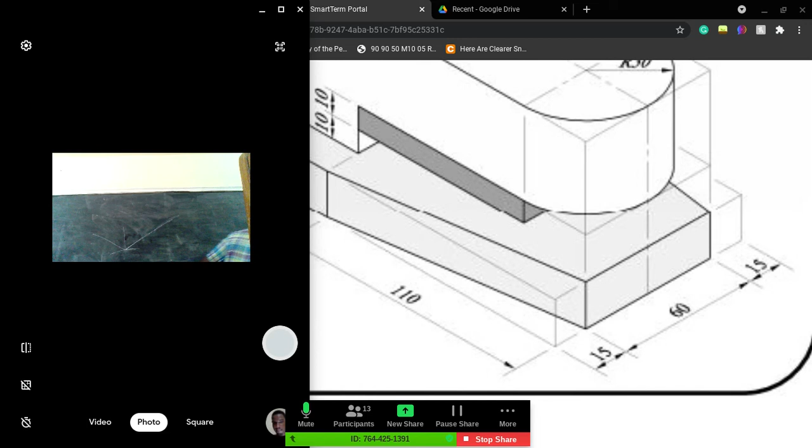We went 160 here, and we went 90 here. Good? The next thing is the height. Let's look at the height of this drawing now. To find the height of this drawing, you're going to look along the vertical side. It says 20 plus 40 plus another 20. Do you guys see that? So that's 20 plus 40 plus 20.

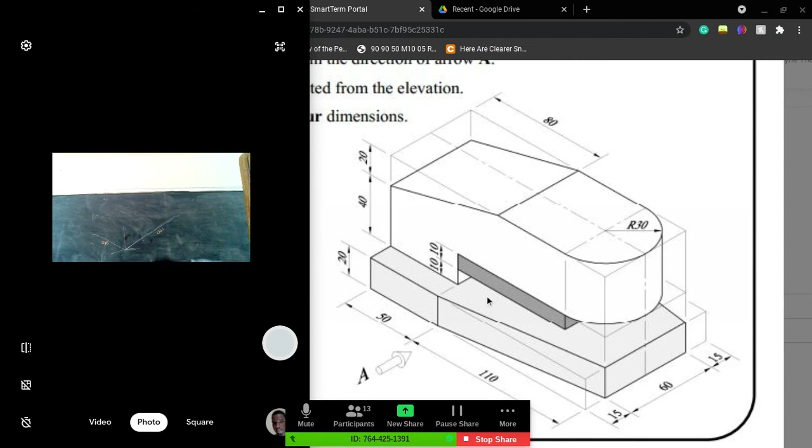What's 20 plus 40? That's 60. 60 plus 20? 80. Isn't that correct? So you're going to go at a height of 80. Okay? And then you should be able to form your box completely.

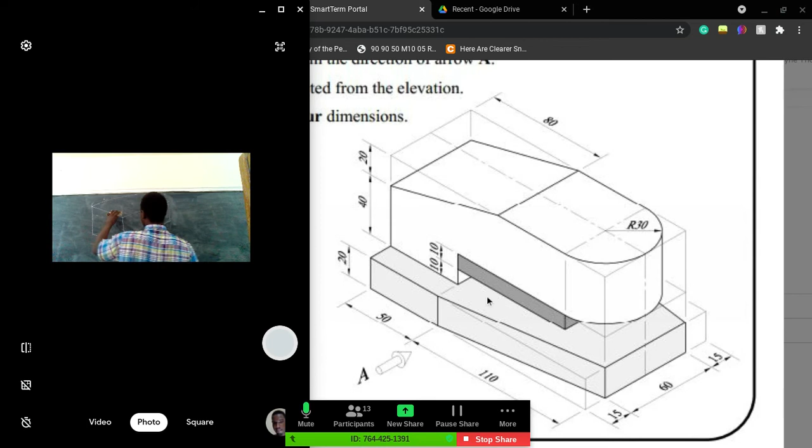Okay, good. Now here's my box, a rough sketch. But with this sketch, I'm going to help you to fill in your details. Alright, it's not a perfect box, but it will get the job done. So pay attention for me now. The first detail you would like to fill in is the measurements that will help you. So let's first start from the back. We're going to draw in this 50.

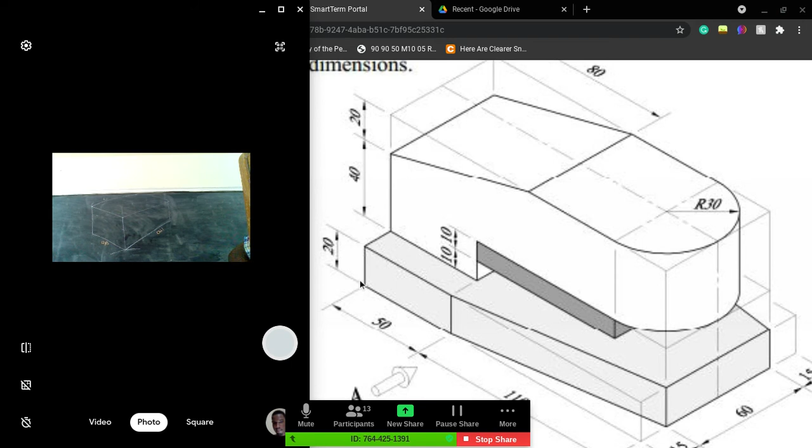And here we go. So to draw in this 50 detail right here, we're just going to highlight with our main line that we have a line there, 50. What's the height of that line, Chirag? What's the height? It says there 20. 20. So I'm going to draw now a parallel line, the height of 20, copying that angle, draw it downwards. There I go. Okay, let's connect it back.

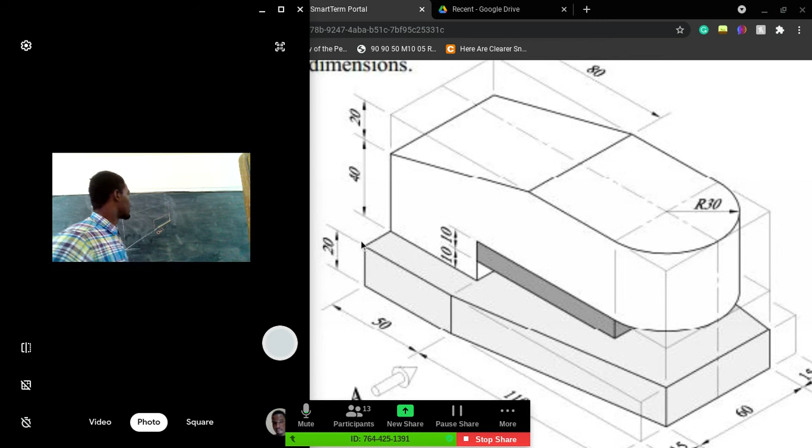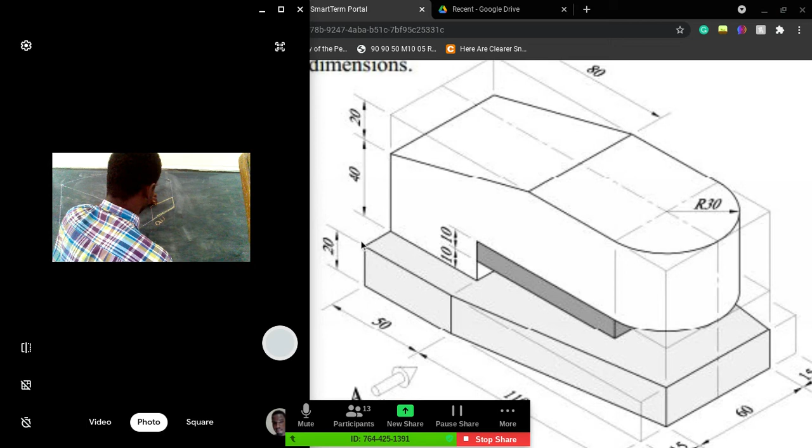Sir, can you repeat that for me? Really hard to see the board. Alright, 1 second. Alright. So let me fix that again. So this is what we just filled in.

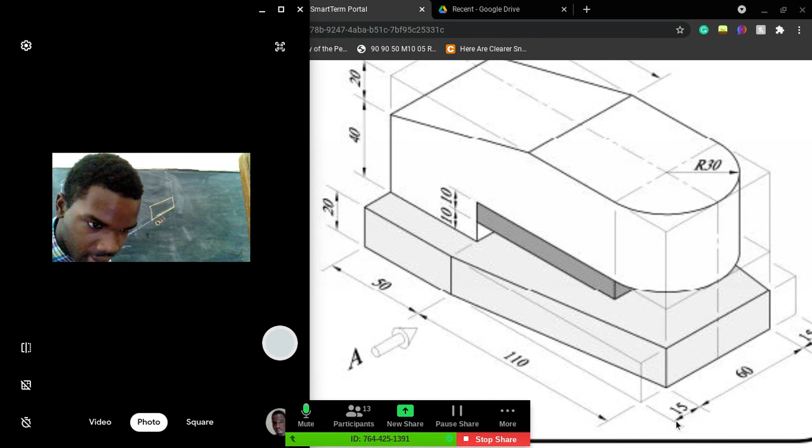The next thing that we know, right, is that down this side, the entire distance from here to here is 110. But we don't know the distance that it goes in. However, we can see on the front view right here, it goes in 15. So I'm going to go here and I'm going to mark off 15. Alright? And then, look closely. Once I've marked off 15, I'm going to go into the midpoint of 45 and I'm going to mark it off there.

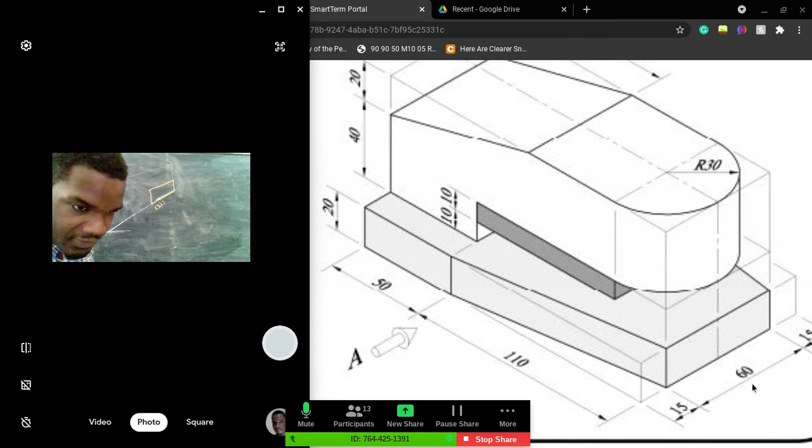Here's what I'm going to do. Since here is the midpoint, I'm going to say half of 60 in this direction and half of 60 in this direction. Wouldn't that give me the entire 60? Hello? Sir, which perspective are you looking at from? Isometric. So are you looking from the curved side? Yeah, so where the cursor is, right here. So I'm looking at this point right here.

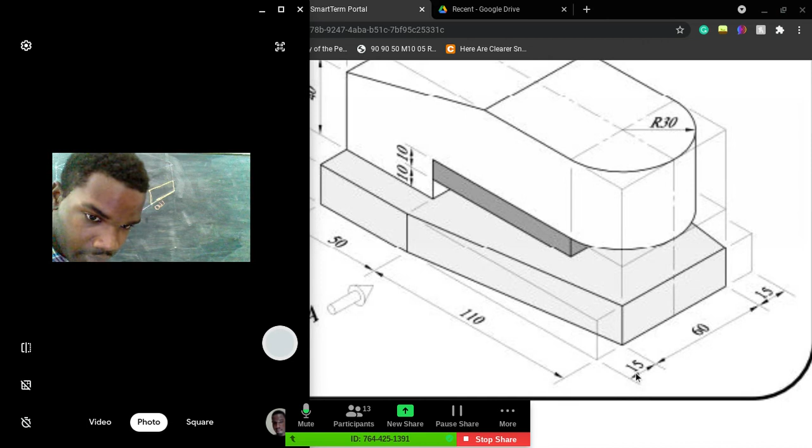I'm saying from this point, which is here, I don't know how much the line goes in, but I see that it's 15. Okay? I don't know the angle, but I see that it's 15. So what I'm saying you should do is that entire length right here is 90. You're going to go in half of 90, which is 45. Have you done that? Yes?

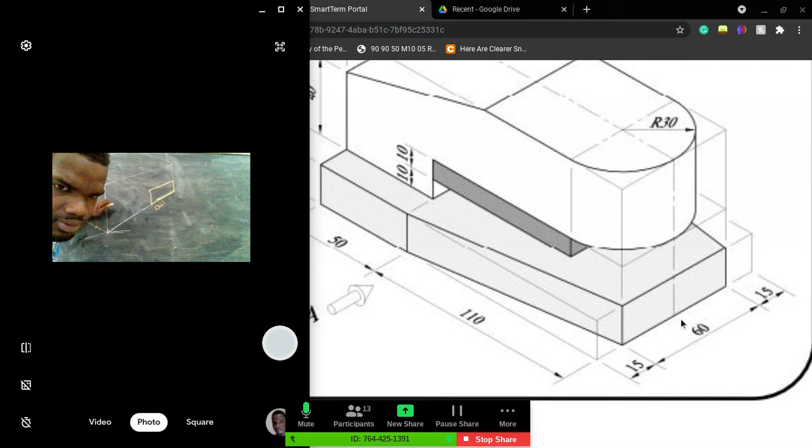We can do isometric for this one. Is isometric we're doing it in? What are you doing it in? No, but for the work we're supposed to post on the portal, you said something about perspective or oblique, not isometric. I never said, no, that oblique drawing was for the previous work that was due yesterday. Alright, look at this, everybody. The work that you're doing now is due on Monday. That is to be done isometric.

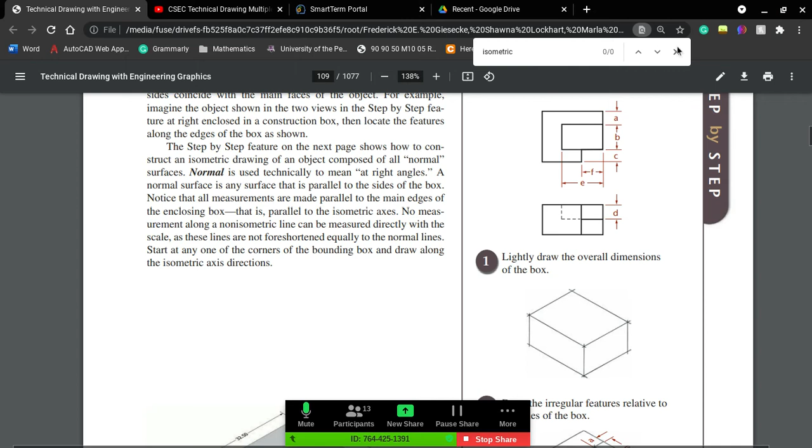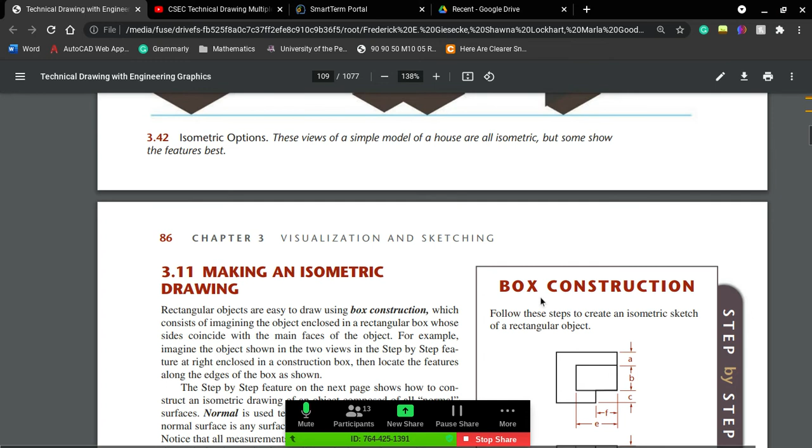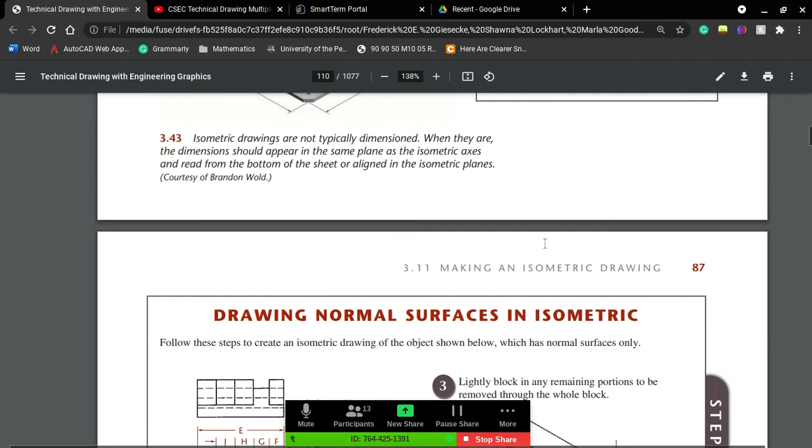The work that was done yesterday, or the class before, which was the sketches, right? I think I posted pictures here. Let's go back here. It's on page, and scroll down. 1 second. So these drawings that I'm referring to here is what you would choose to make it in oblique. So you remember that drawing that we had on the board? That's what I was talking about, oblique. Think I have it here. 1 second. Alright. I'm going to post it after class as well, just to make sure that we're on the same page.

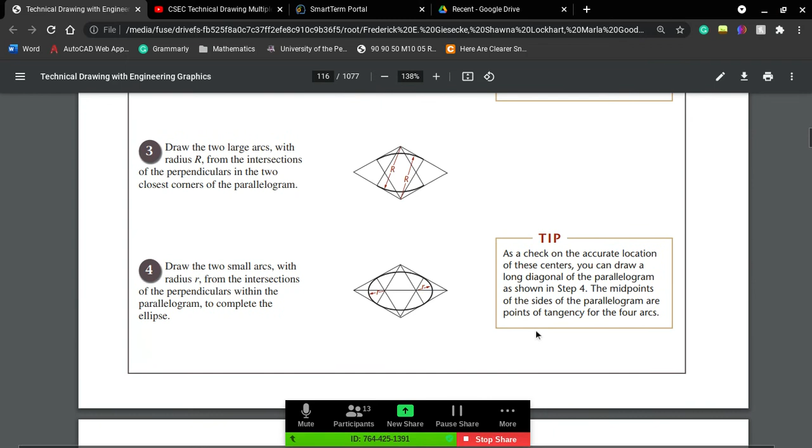Alright, I'll look for it after class, Isaac. But pay attention for me. The work we're doing today is going to be isometric. The work that I gave you last class was doing oblique. There you go.

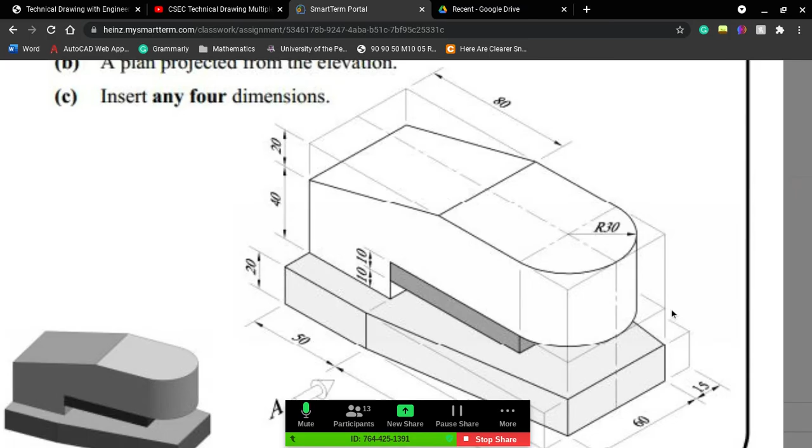Good? So is everybody following with me? Is everybody at this stage? You guys are very quiet today. Let me get some roll call. Ariane, Christoph, Dimples, Cameron, Abigail. Is everybody at this stage?

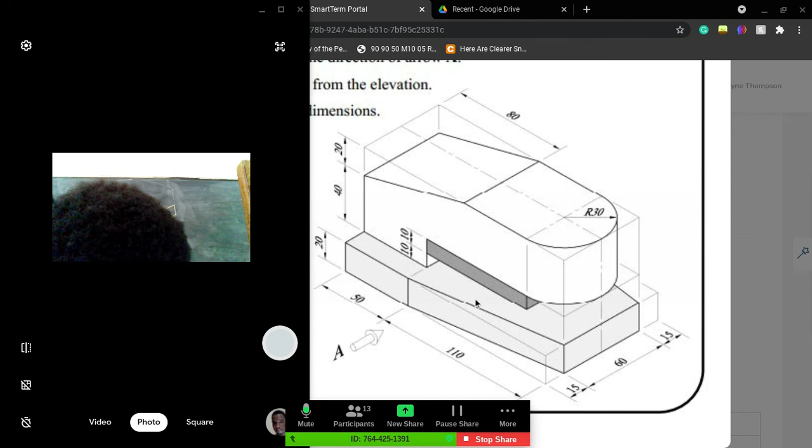Yes? What are the measurements for the pipe? Where are the measurements for the what? Yes, that you're drawing the construction. Are you talking about this drawing right here? Because this is the drawing that we're doing now. Yes, sir. Right, the measurements you can see on the side, 50 millimeters, right, 110 millimeters, 15 millimeters.

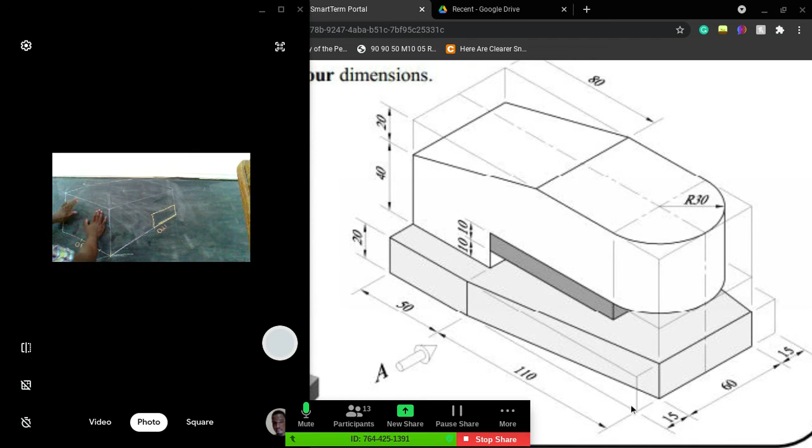Everybody following? So what I just did a while ago, we're looking at this part of the drawing, which is here. And we're saying that the distance is 90 millimeters all across. And once you know it's 90 millimeters, you're going to go half of the 90, which is 45. And then you're going to go now 30 on both sides. Because when you say 30 on both sides, that gives you the distance of 60 by itself. So let's fill in that now. You have something along the lines of this.

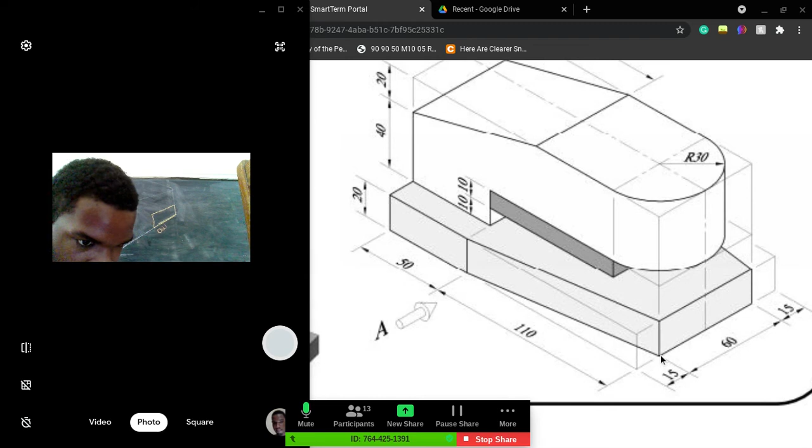Alright, once you fill in the 30 on both sides, what was the height of this now? Harshita, what's the height of this block right here? 20. 20, so we're gonna go 20 upwards. Excellent. We're gonna go 20 up.

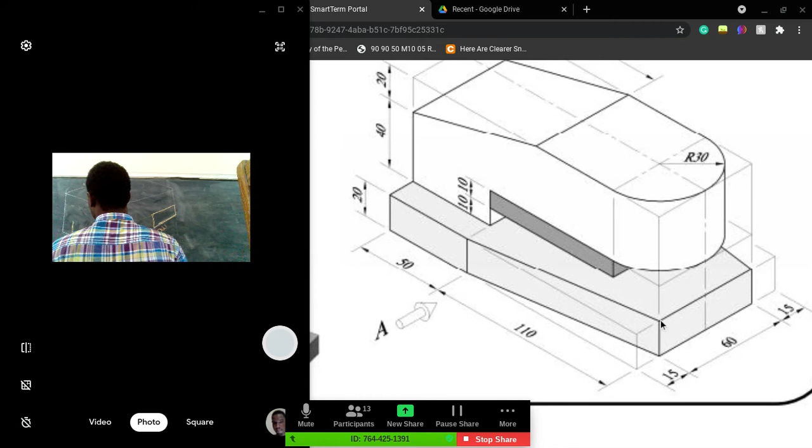Good. And once you've gone 20 up, now we can connect this point back to here. And that tells us our angle. Good. Let's continue. Let's connect this point back to the top as well. That will tell you your angle. Okay? So we've pretty much finished with the base.

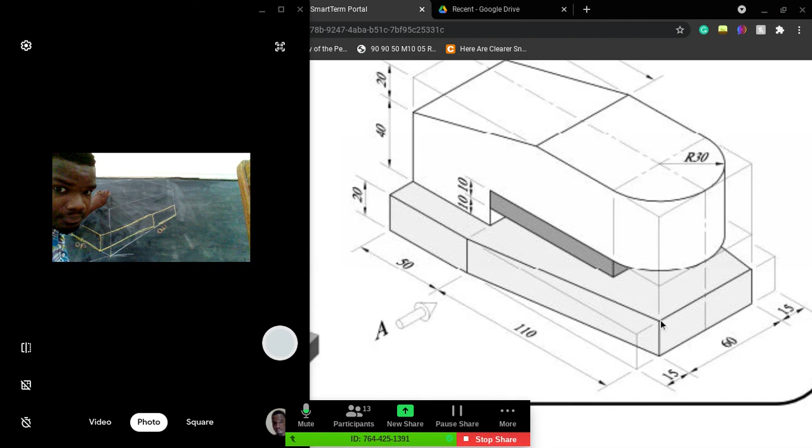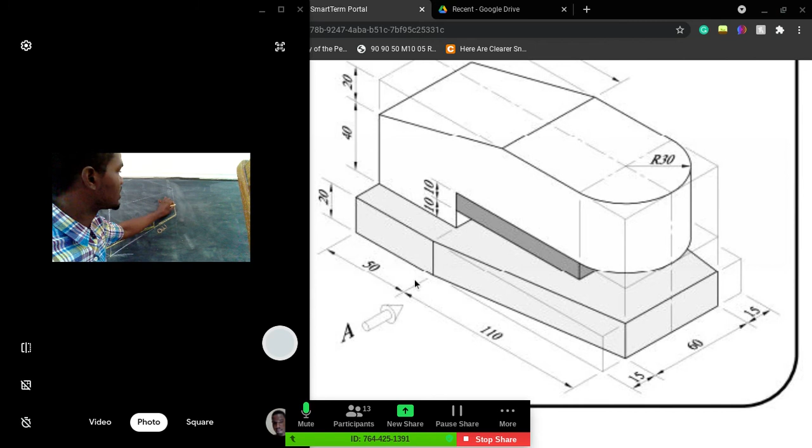Now let's focus on the top. Alright? Can anybody tell me now? Let's look at the top quickly. The distance between here and here, following down here, isn't it 15? The distance between here and here, isn't it 15? Based on what we have down here. So we're going to draw a line of 15 millimeters going in. 15 going in.

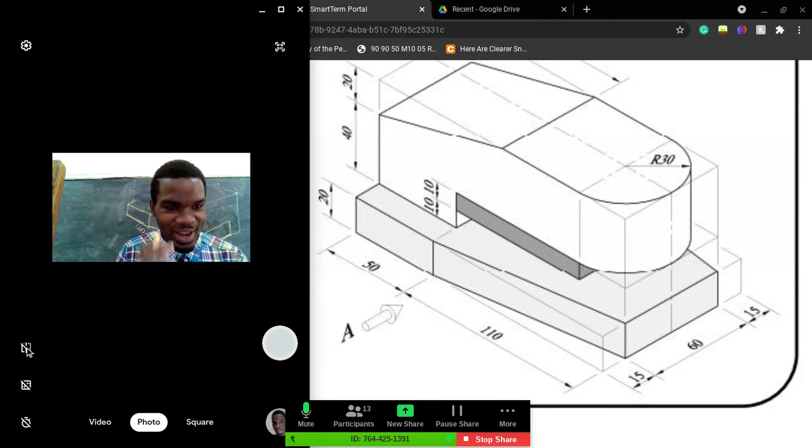Okay? Wait, is my camera reversed? Is that it? I think my camera is reversed. Yes, sir, I can. So my question is, why didn't anybody speak up? If you couldn't see what I was drawing, why didn't you speak up? I didn't realize my camera was reversed. Can everybody see what I'm drawing now? Looks like you were doing oblique.

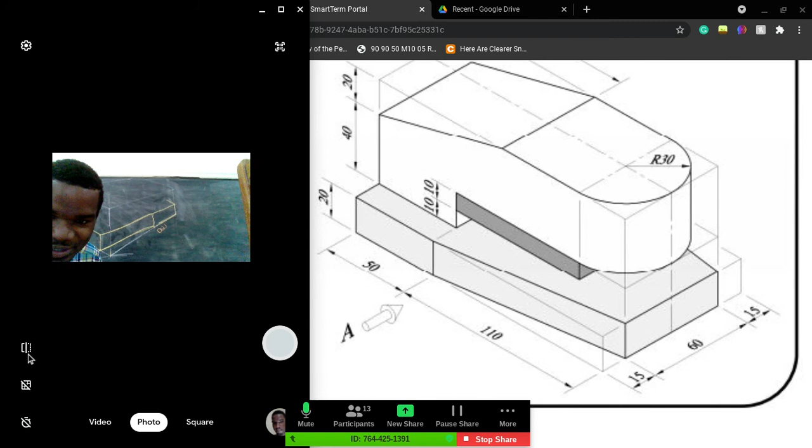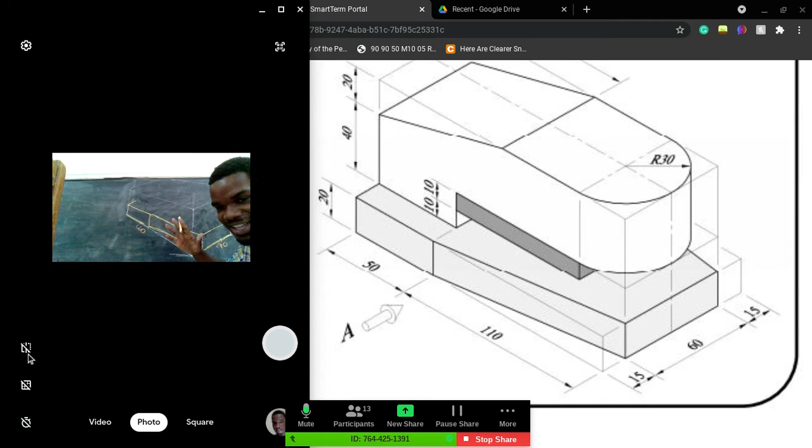So you didn't understand and you weren't speaking up. Guys, that can't be happening. Because you could have told me earlier, sir, your camera is reversed. Please unreverse it. Or just say, sir, I don't understand. Then I would have tried to figure it out. But can everybody see what I was doing all along now? Yes, sir. Alright, can you guys promise to speak up more if you don't understand? Because that was a very long time before I figured it out. Promise? Yes, sir. Thank you. Okay, so the camera was reversed, so my bad.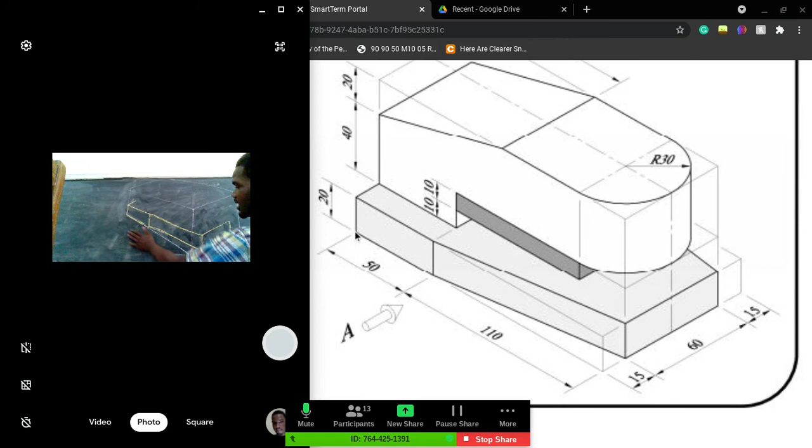So all that we've been doing so far, let's follow the trend. We went 50 millimeters from this point down, right? Then we said the distance from this point to here is 110. So 110 plus 50 gives us 160 on this side. Then we looked over here and saw that 15 plus 60 plus 15 is 90. And I said, if I know it's 90, half of that distance is the middle. So I can say 45 going in, which would be the midpoint right here, and then I went 30 on both sides. Everybody following?

Yes, sir. Then you went 30 on both sides, and then I asked for the height, and Harshita said 20. So when I went 20 up, I connected it back to the base right here, and then, because I know here, I can just connect these points together and I have found my curve. That's all that we've done so far. And now we're looking at this section right here. The distance of this point is 15, this distance is 15 as well, and it's identical. So when we go 15 in, what height are we going to go up?

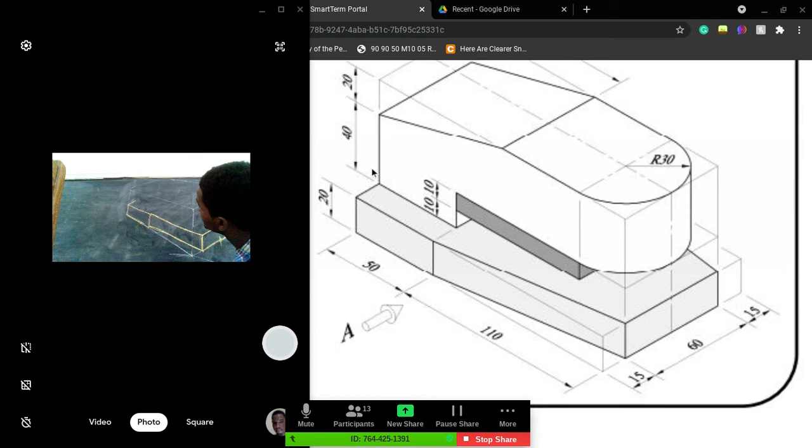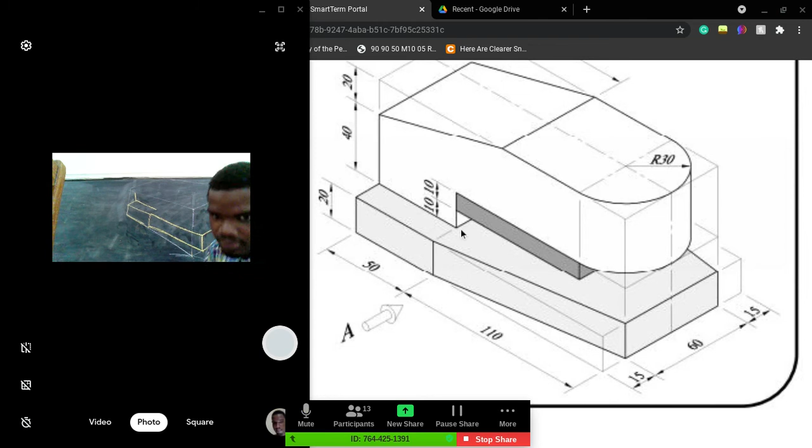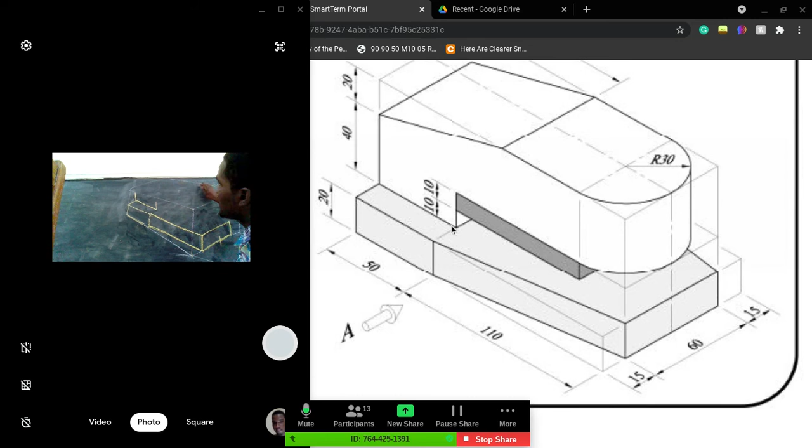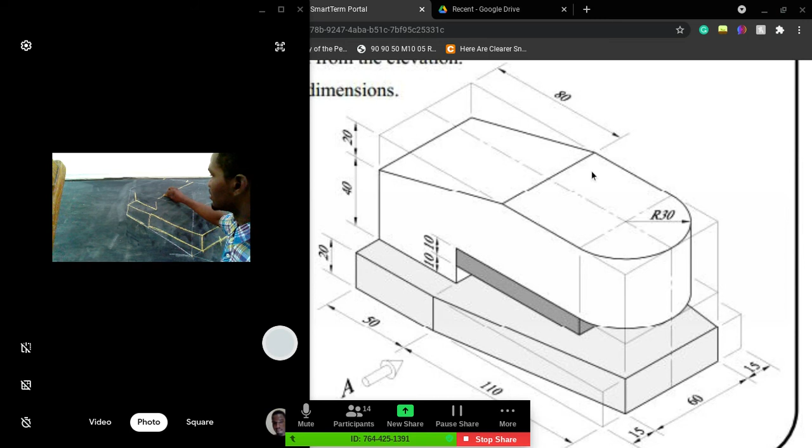So once you find that distance, you're going to draw it across. Let's put it right there. We're going to draw it across. Good. Once you've drawn it across, we're going to connect it to the base like that. Connect this point 20 millimeters down to the base like that, and then you connect the two just the same.

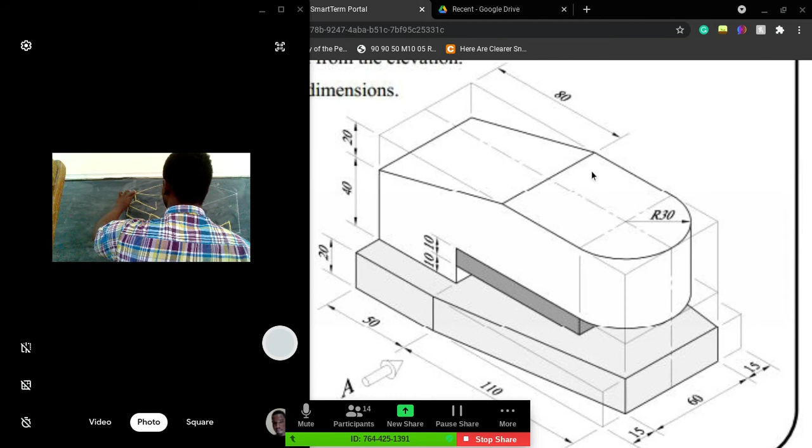And that's your point. So the reason why I'm going through this drawing in such small steps is that I want you to understand the thinking behind it. Right? You can break it down quite easily and finish your drawing. So what we have next to do now is to figure out this curvature. So we're going to find the middle of this curvature now.

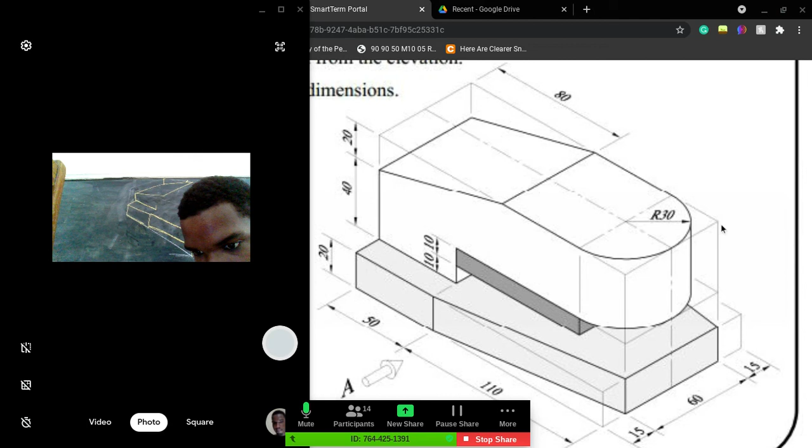So stick with me. Remind me of the distance from here to here for me. What was it? Anybody? The distance from this point all the way down to this point. Wasn't it 160? Hello? Alright, you guys are so quiet. So it is 160, yes.

So what I'm going to say therefore is that from this point, which is the edge here, I'm going to go in 30 millimeters. But I'm going to stop here and I want somebody to explain to me, why did I go in 30 millimeters?

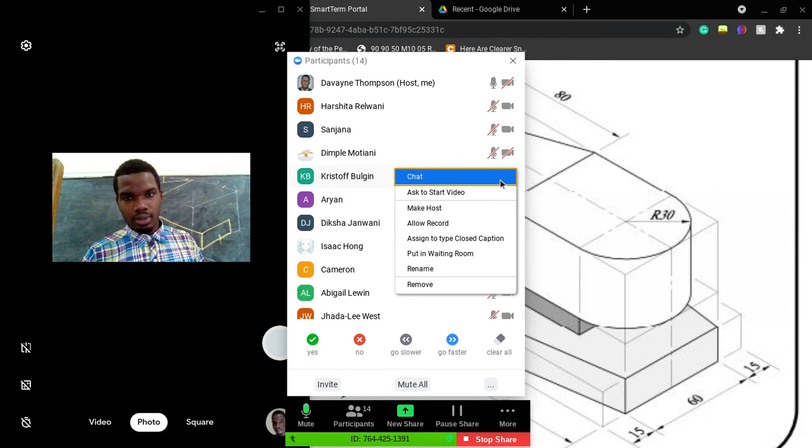Let me call on Aryan. Everybody camera on for me. Kristoff. Kristoff Bulgin. Thank you. Aryan, are you there?

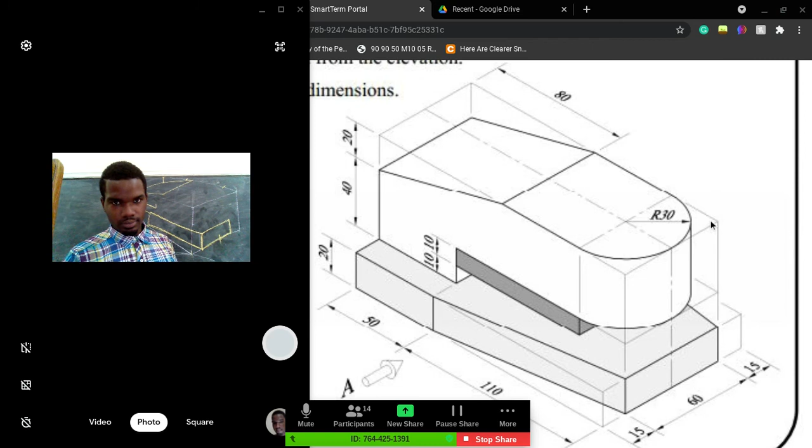Why did I go 30 millimeters in from this point? Because I want to find the center point here. So what is the significance of going in 30 millimeters? Is it so you could get the curves there? Right. That's just that, to get the curve, but the significance of this 30 millimeters is that it is the radius. And the radius is from the center point. Alright? So when I found that distance, I'm going to find the center point here as well. And when I combine the two, that is the center point for the curve.

Good. Alright? So if it's 30 millimeters, then the entire box will be 60 millimeters. So when you draw your construction box, pay attention. You can't just draw half of the box. You must draw the entire 60 millimeters going across. So 30, then 30. Good. And then now, you're going to connect this point downwards, downwards.

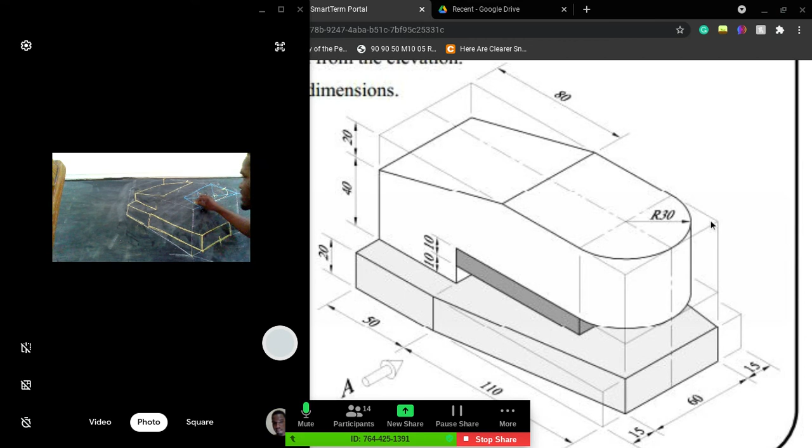Okay? And using this point, is everybody following what I'm doing? Using this point now, we're going to get the curvature. Using this point and our radius of this distance, we get the curvature here. Okay? And then now, using this point, we get the curvature for here as well. And once that's done, we connect it back to this point.

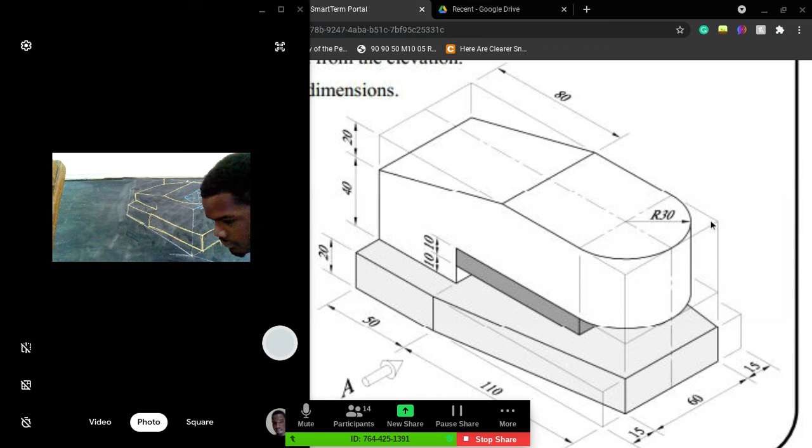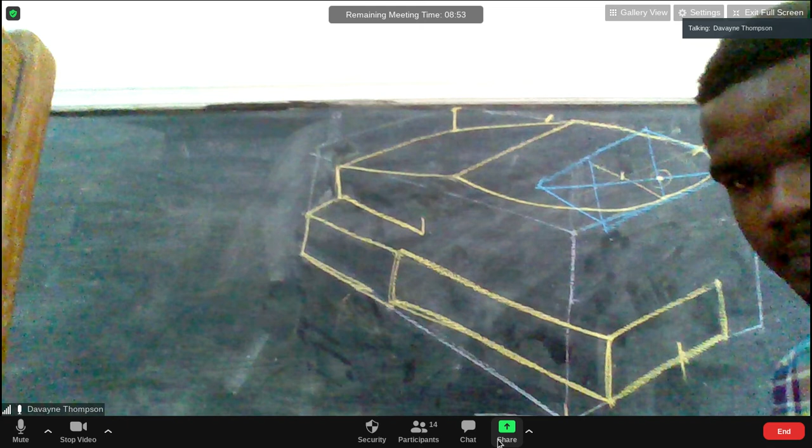Everybody following so far? Or do we connect it freehand? Repeat that for me. Do we connect that to the point freehand? You were breaking up. I didn't hear you. What did you say? I said we will connect that curve to the point freehand. Alright, can you type what you said? You're breaking up. My bad. Alright, hold on. Let me stop screen sharing. Alright, try again for me now. What did you say? I said, do we connect that curve to the point freehand?

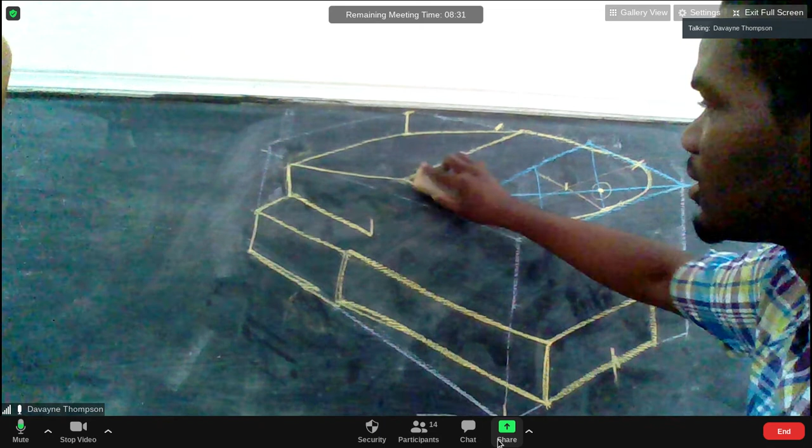No. Use your ruler. Use your ruler. So once you get this curvature right here, right? You're then now going to use this point to get the curve onto this line. So my bad. This line is to connect all the way down to this construction box. So when I draw the curve from here, it should touch the construction box entirely. And then I just connect it just the same. Understand?

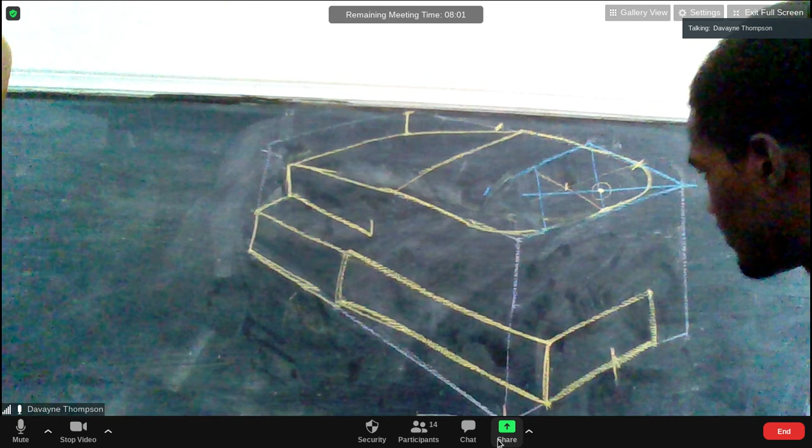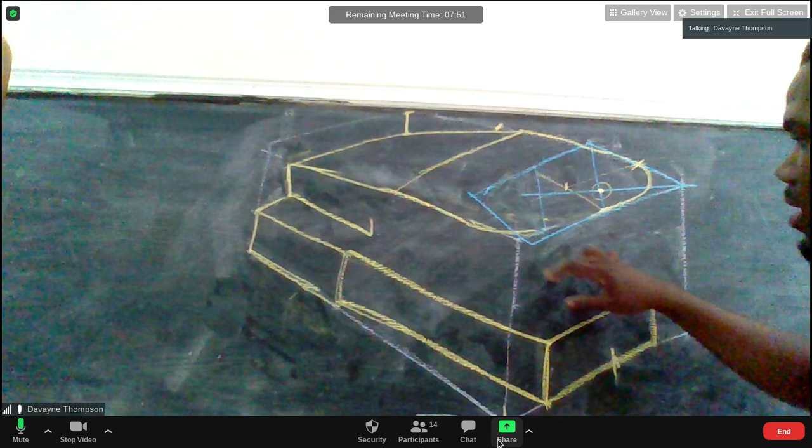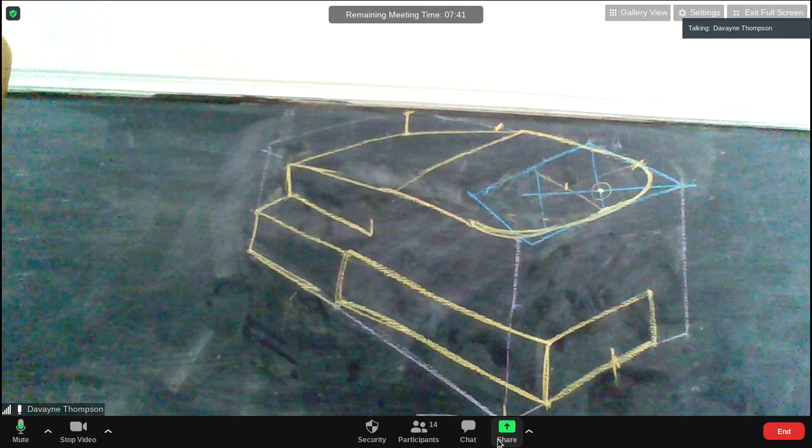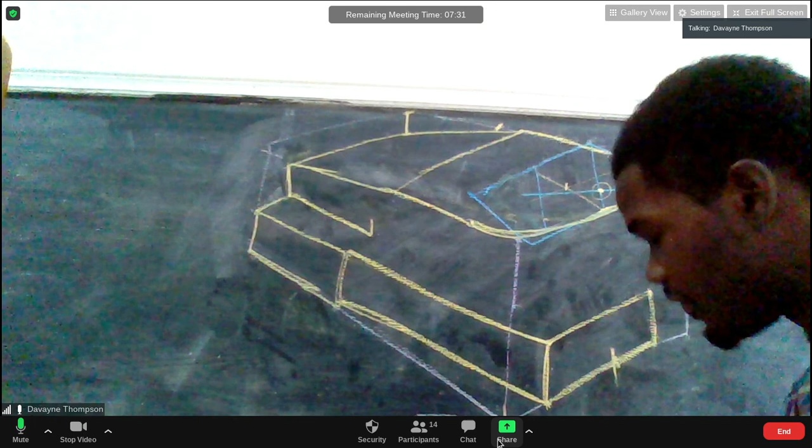Okay. So the next thing now is to get the base of this curve, which is here. To get the base of this curve, you're going to picture you're copying the entire thing and giving it a height. So what you're going to do, you're going to find the center point, which is here. Let me use a different color. And you're going to go down based on what the height is. So let's look at what the height was on the drawing.

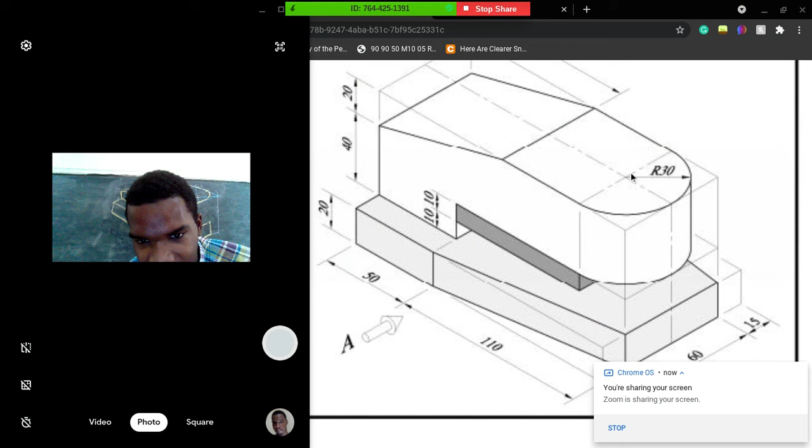The height given was that it is from this point all the way down. So from the top, 20, 40. So it is really saying that it's going to be 40 millimeters down from this point. Everybody see why? Starting from this point going down, and I'm stopping here, I am stopping with this 10 millimeters stops as well. So that means it is 40 minus 20 plus 20, and that's 40.

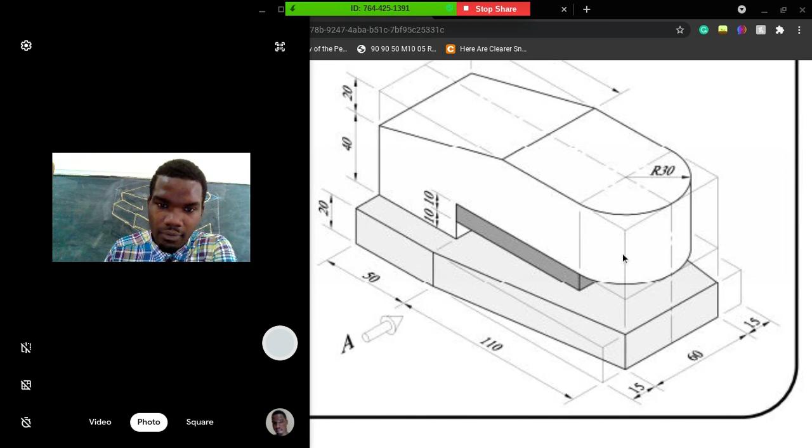Let me repeat, 20 millimeters plus 40 millimeters would give me the entire distance here. But I want to go back up to this point, and that is what they're telling me, subtracting 20 millimeters. So that means therefore it's going to be 60 minus 20, which is going to be 40 millimeters. Everybody understand? So you're going to draw this point 40 millimeters down, and then you're going to do the same process, going 30 millimeters forward, 30 millimeters back, forward again, back, connect this.

Alright, and once you've connected it, you have your two main points. And that will give you your curve off the base, which is what we're going to draw up. And once you get the curve of the base, this point, you're going to extend now all the way back to that point.

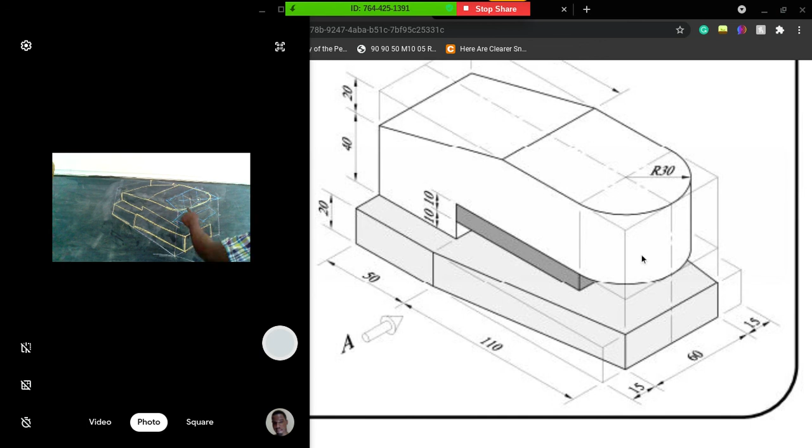So let me clear this up a little bit. I'm going to redraw this just to make it a little bit more visible. So you go down, and then you're going to go out 30 millimeters, 30 millimeters, 30, 30. You connect the points. From this point to here, connect. From this point to here, pass it through, and then using the center point, you're going to get this curve. Then using this curvature of this point, you get that distance, and that will give you the curve along this line.

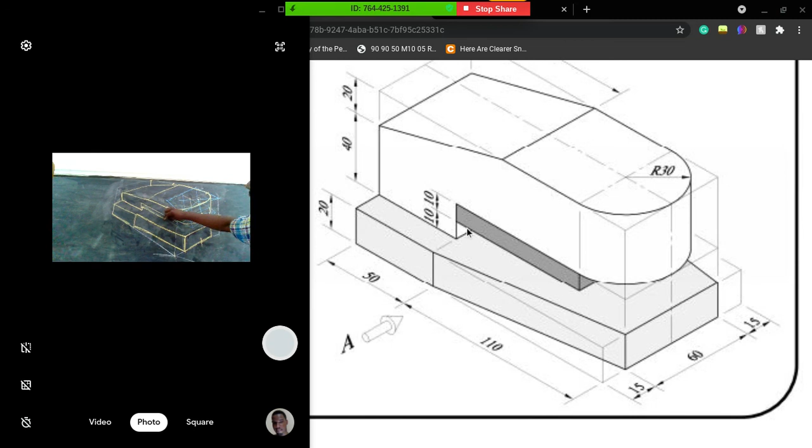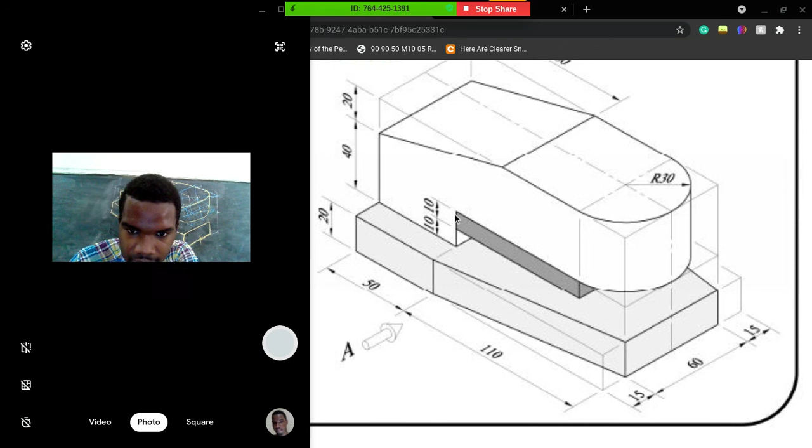Everybody understand? And the last thing to do on this drawing is just to go down 10 millimeters, drawing a parallel line, stopping at some point, which is going to be 30 minus... not 110. This entire distance is going to be, let's check it. Look closer. Let's do some calculation. What would be this distance right here? We're starting from the 50-point line, so that means we're at 60 right here.

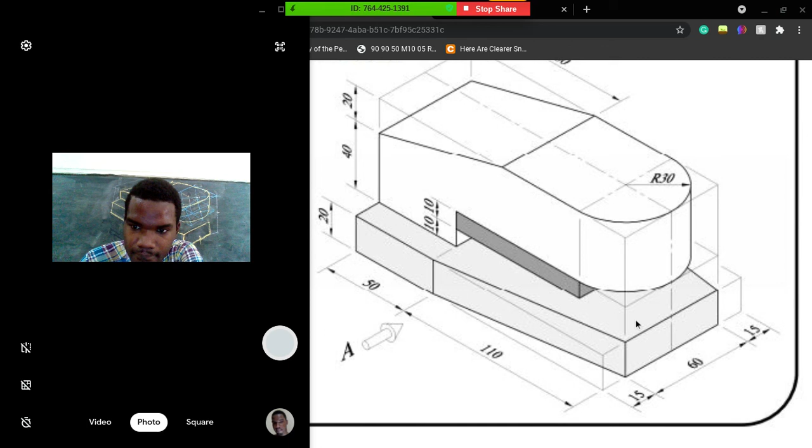So I'm going to continue now until I am here, which is actually what distance? Isn't it going to be 110 minus 30? Does everybody see that? This entire distance minus 30 will carry me to this point. So what's 110 minus 30? Guys, what's 110 minus 30? 80. So you're going to draw a distance of 80 going down.

Then you complete the project just the same. The last thing you have to do now is just to draw a line there, and that is your finished stapler. Any questions? Hello, any questions? I don't think so. All right. I'm gonna send a picture of this awful sketch that you can follow. And this drawing is due on Monday, guys.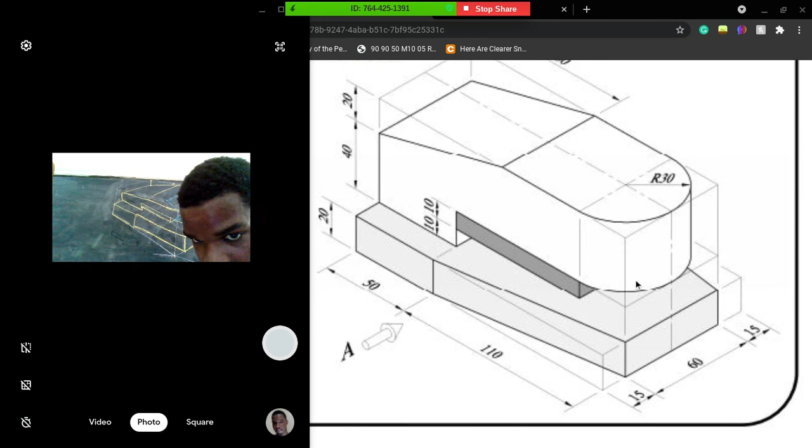Sir, isn't there a need for like 2 different construction boxes or something? Repeat? Do we need like 2 different construction boxes for this? No, just one general construction box. But I want to make sure you understand how to get the curve here. So I'm just going to redraw this quickly and go over it one more time. Look closely again. We said that because it's a radius of 30, from this point we're going to go in a distance of 30 millimeters, then draw a center line. Given that we had our construction box here and here, we're going to now go into the midpoint, and wherever they intersect, that's the center point for this project.

Okay, good. And then now you're going to go 30 millimeters to the right, 30 millimeters to the left, 30 millimeters up, 30 millimeters down, 30 millimeters across, 30 millimeters across. The same. So I've made it smaller because I want you to see the process of getting the curve. So the process is that from this point you go down, from this point you go down as well, and then you connect it through the midpoint. And then using this point you get the curvature here, and then using this general point you get the curvature there. Does everybody understand that?

One second. Wait, this is waiting room.

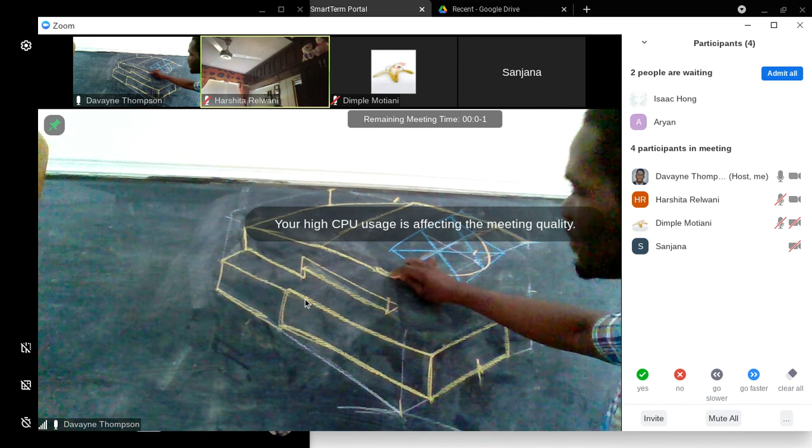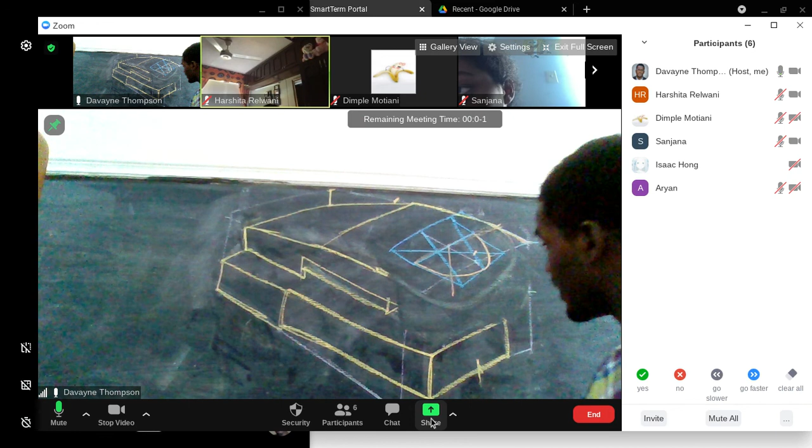Good. So this is finished up. So on a bigger scale, this should have been your curve when you extend it all the way out. Now to get the base, as I said, you're going to mirror the top by carrying it down to a height of, what do we say the height was again? I think it was 40. Well, whatever the height was, you then go 30 this way, 30, 30, 30, connect them now together.

And then using the same principle, connecting back down, passing it through, using this point as your curve, and the upper base as your final curve. You get the 2 points and you can connect it back to your drawing. Everybody understand? Does everybody understand what to do? Yes, sir. Alright, good.

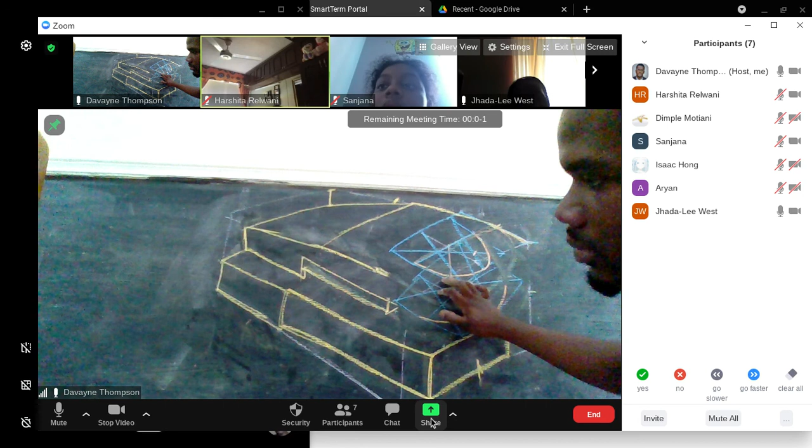Kinda. Okay. So if you have any questions, please just message in the group. If you're a little bit shy, message me and then I'll answer in the group. That's no problem. But this is completed by Monday, and the previous one, you have until this evening to complete it, which is the 3 sketches. So let me put the 3 sketches back on the screen before you go, if you didn't get to take them off last class.

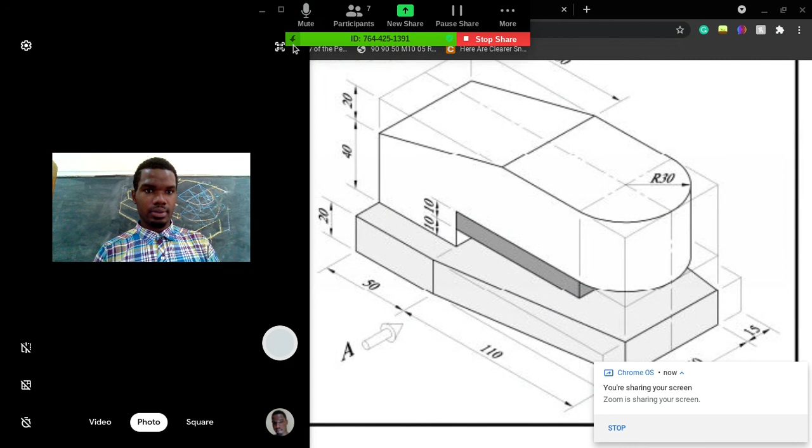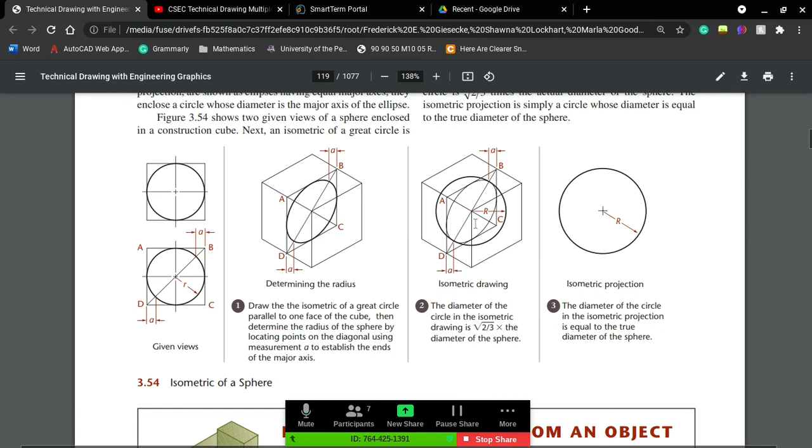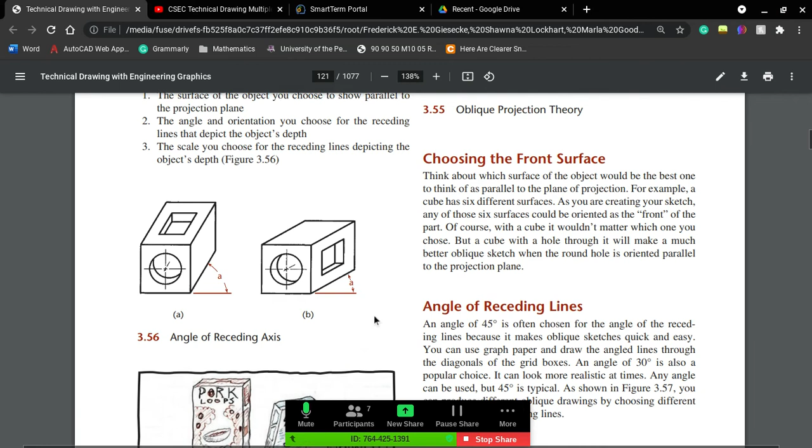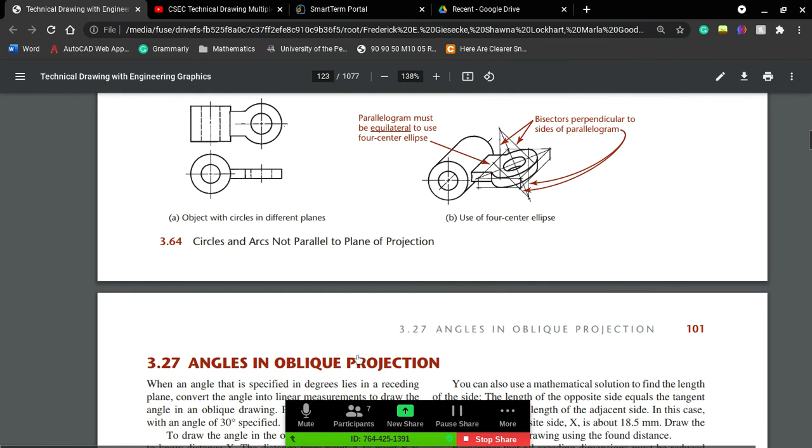Sir, with this assignment, it says we have to submit the sketches with this paper as well. Yeah, because someone was saying that they don't see the other work. So let me remove the title, since you say you can see it now. I didn't know when you posted. Right, so it's just isometric projection of the stapler I want for this one. Good, there we go. So I'm trying to find the work I gave you last class to complete. Oh, pictorial sketches. It was on the pictorial sketches. Right, here we go. Page 80.